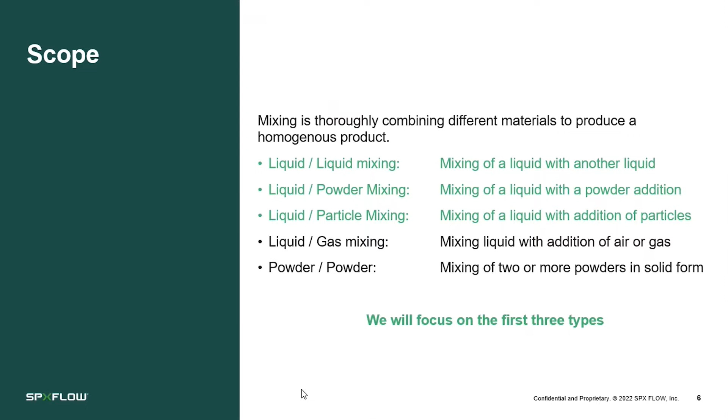Why is mixing so important? Well, here are some of the reasons. Firstly, consumer trends and tastes are evolving continually, and new products often require different ingredients to mix, or new or different mixing processes to achieve the desired result. Mixing often takes place early in the process, and the quality of the mix has a direct impact on the quality of the finished product.

Consistency, both in flavour and taste, is key to maintaining brand loyalty, and that recognition that comes from consumers recognising the quality of a product that they like.

Today, producers are expecting better efficiency in their mixing and in their processes in general, and the quality of the mix has a direct impact on the operation of downstream processes, for example, pasteurizers and homogenizers. And then raw materials are expensive, particularly more advanced ingredients, and producers want to mix ingredients as accurately as possible with maximum utilization of trace ingredients to minimize operating costs.

So these reasons why mixing is important show that both quality and consistency, as well as cost, are critical characteristics which a mixer can influence.

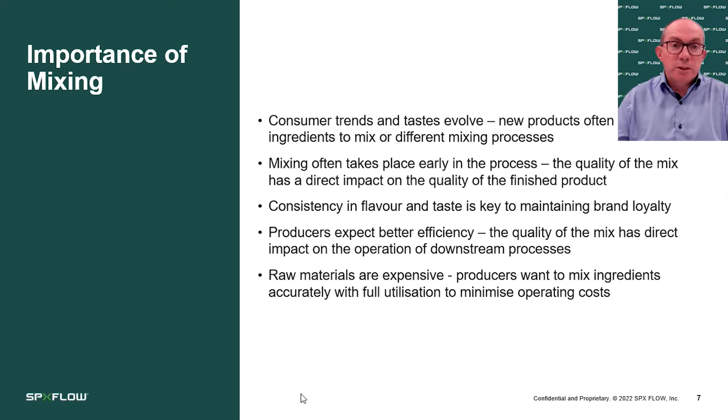So now I want to introduce the Flex-Mix Pilot Mixer. You see here that there are two models available, the multi-duty model shown on the left and the more basic model shown on the right. We'll go through the characteristics of both.

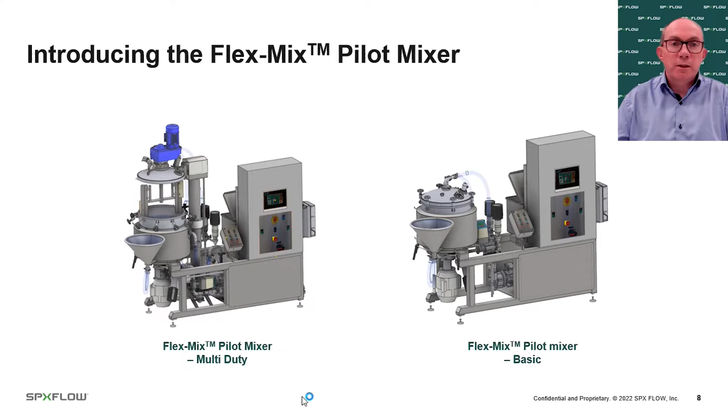These two models cover a number of different mixing techniques, which we'll talk through in the presentation. Firstly, we have atmospheric mixing for typically low viscosity products, such as ice cream mix or recombined dairy products. This uses internal recirculation and scales up to our Flex-Mix Liquiverter mixer.

Then we have vacuum mixing, also for low viscosity products. This is typically used on products like infant formula, plant-based products. It produces a better mix result than atmospheric mixing, uses external recirculation, and scales up to our Flex-Mix Instant mixer.

And then finally, we have high viscosity mixing with or without vacuum or heating. This is for products such as processed cheese, condiments, and bakery inclusions. This type of mixing has external recirculation and scales up to our Flex-Mix Multiverter mixer. This is the type covered by the multi-duty model, which in fact covers all three. The basic model covers the first two types of mixing techniques.

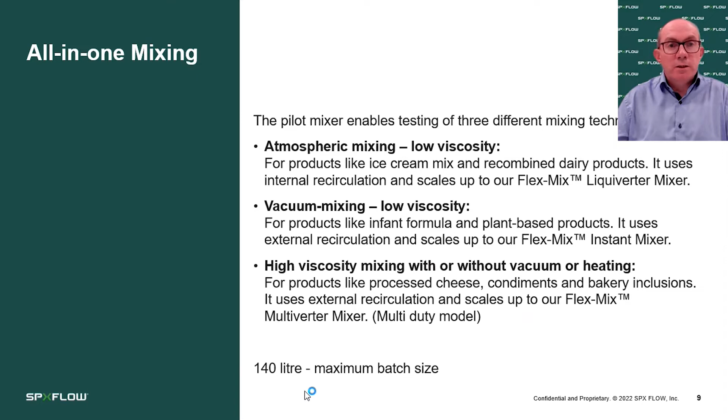The pilot mixer has a capacity of 140 litres, so it's very conveniently sized for small-scale test batches or slightly larger pilot-scale testing or production.

Now we look at some of the operating principles of tank mixers in general, and specifically the new pilot mixer. The heart of the mixer is the bottom-mounted mixer at the base of the tank, sometimes described as a rotor-stator mixer. This is a rotor-stator device mounted on a shaft, driven directly by a motor, and it generates a flow. This flow can be recirculated internally in the tank, or recirculated back around an external loop, providing additional functionality. So it acts both as a pump and a mixer.

When in operation, a vortex sucks both the powder and the liquid down towards the rotor-stator mixer. In both the mixer pump rotor and the surrounding stator, high shear forces and turbulence are created, ensuring effective and homogeneous mixing. In the pilot mixer, two different stator rings are provided for slightly different functionality. You see on the right the image of mixing without recirculation and with recirculation, using different mixing stators.

We'll take a look now at how it looks for the different mixing modes.

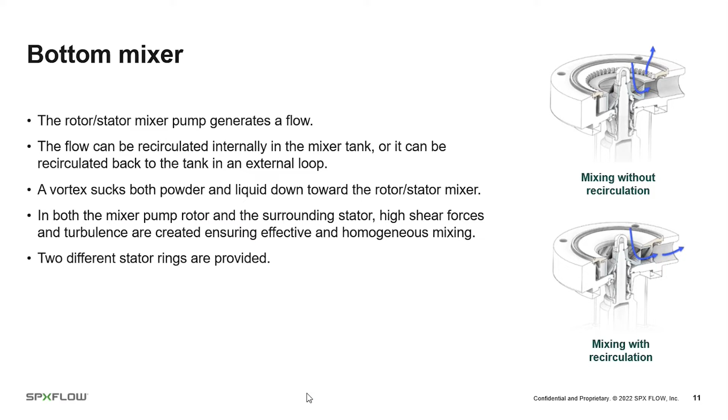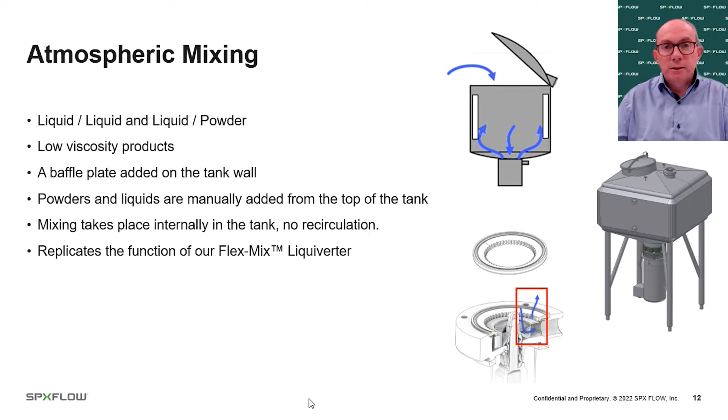We look then at vacuum mixing, a slightly more advanced technique. It's used for liquid-liquid and liquid-powder mixing, same as atmospheric, also on low viscosity products. But here the vacuum and closed mixing improves the mix quality. The powder is added by being sucked in through a powder inlet valve using the vacuum in the tank, and it's mixed in under the surface of the liquid under vacuum. The mixing has recirculation on an external loop, with pressure generated by the mixing head itself. This technique gives better mixing, for example with reduced foaming. No agitator or pump is required to operate this mixer, and it replicates the function of our Flex-Mix instant mixer. This is a more advanced mixer where higher quality mixing is required, or where there's a risk of foaming.

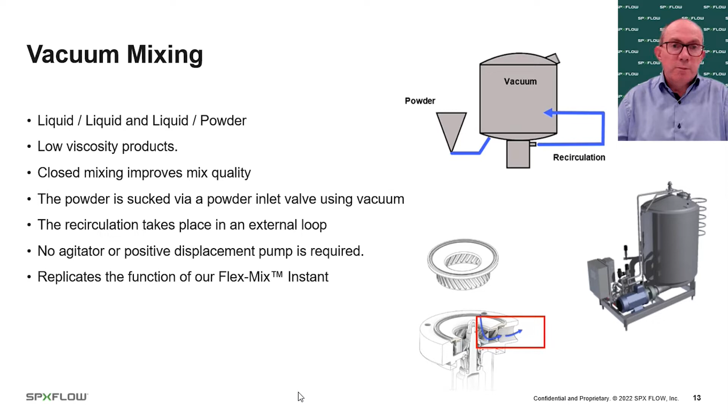Then we have the third type: high viscosity mixing with heating and vacuum options. This is covered by our multi-duty version of the pilot mixer, which also covers the previous two. This is used for liquid-liquid, liquid-powder, and particulates on medium to high viscosity products. The powder is still sucked in by the powder inlet valve using vacuum, as with the vacuum mixer. Additionally, we have an agitator and a positive displacement pump to give mixing inside the tank because of the product viscosity, plus recirculation externally using the pump. The tank itself is pressurized and has indirect heating on the jacket, with the option of direct steam injection. This replicates the function of our Flex-Mix multiverter range, used for those higher viscosity products.

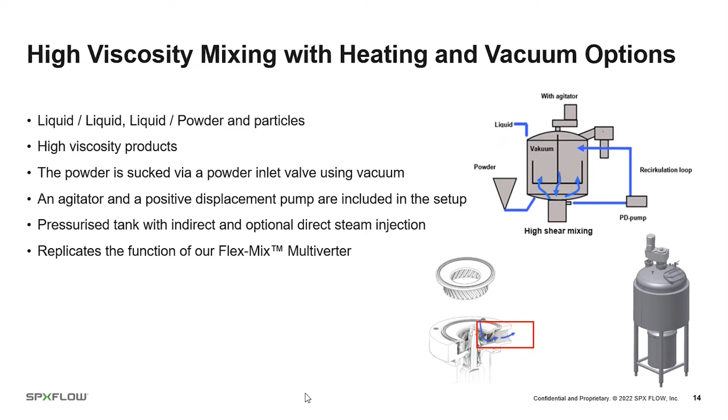So let's look now at the benefits of these mixers in the different modes and what value they bring. Here's a list of some of the features and benefits you get from them.

Firstly, it's a highly flexible solution. You can test a range of products from low to high viscosity in small batches, all in one mixer. You can develop recipes for everything from infant formula, ice cream, and plant-based products to dressings, sauces, and high-protein yogurts, to name a few. As well as being suitable for small test batches, small producers can also look at making small batch production runs from 80 to 140 litres, depending on the recipe. So if you have frequently changing products or need small batches, this mixer gives you the flexibility rather than having to make larger batches and have more product waste.

It's a sustainable solution. You have that flexibility to test in your own plant, or you can look at renting a unit from SPX Flow, or indeed come to or send product to our innovation centres where we can do the tests on your behalf.

You have reduced raw material waste because you can test smaller quantities and batches. It's a compact and ergonomic design, which just requires one operator to carry out all the functions. And then finally, and perhaps most importantly, it's scalable results and dependable results.

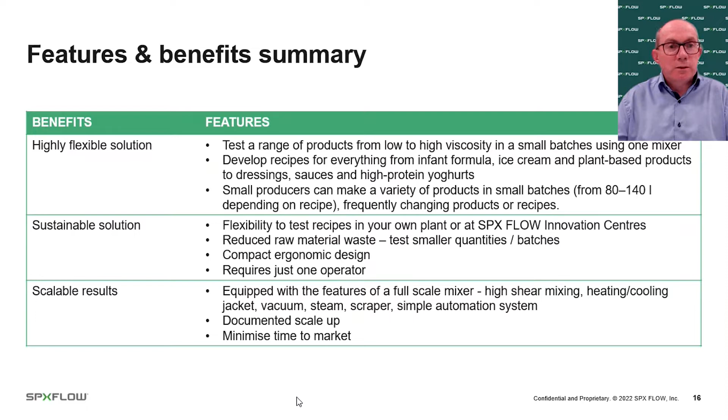Here's some of the applications that we can handle using this product. For example, mixing a product with low, medium, and high viscosities, operation of vacuum or atmospheric settings, and incorporating dry and semi-solids into the liquid.

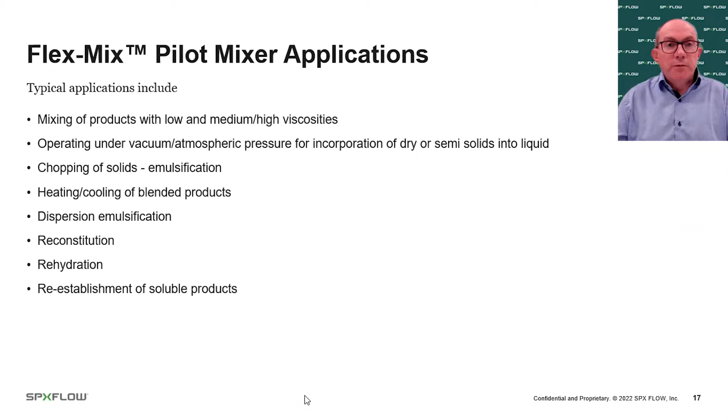Chopping of solids and emulsification with the mixing head, heating and cooling using the jacket, dispersion emulsification, reconstitution of powders, rehydration, and re-establishment of soluble products. So we have a very broad range of applications that can be handled.

Take a look at some of the key features. The image on the right here is the multi-duty version, which we talked about, which has some additional features. I won't go through all the details, the table sets it out, but some of the things to highlight are the scalability to our different mixer models, and the multi-duty version scales to all three, including the multiverter for the higher viscosity products.

The basic version has got the atmospheric and the vacuum mixing. Also to mention that the multi-duty version has the pressurized tank, the agitator, which is equipped on a lift arm that you can see raised here in the image.

A system for direct steam injection is provided as an option, as well as having the positive displacement pump as standard. So depending on your requirements, you would select the basic or the multi-duty pilot version, and a number of options are available additionally to tailor the mixer to your particular needs.

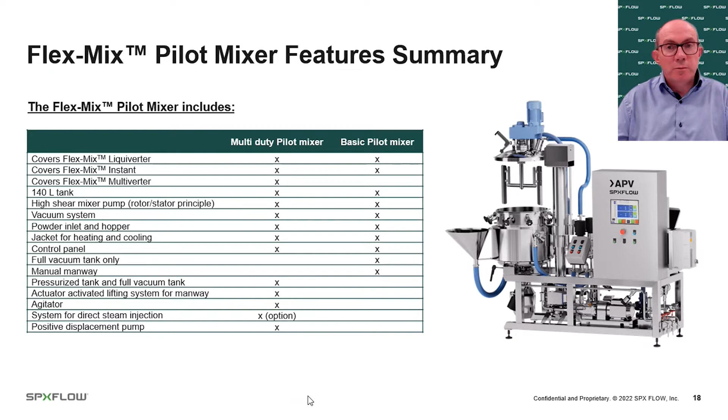Some of the key features and the overall dimensions. The batch size is 140 litres maximum, and as mentioned, it's 80 to 140, depending on the recipe and how the mixing function is set up.

We have an operator interface screen for controls, and we describe it as partially manually operated. That's because the operator needs to intervene at some critical stages to add ingredients, for example. But the control system takes care of the control of all the automatic parts and the temperature control and the instrumentation. The interior stainless steel is finished to 3A standards with 0.8 micron surface finish and polished welds.

And of course, it's a sanitary design for CIP cleaning. The tank in the multi-duty version is pressurized, or a full vacuum version in the basic. So that gives some different functions depending on the vacuum and heating requirements, for example.

The tank is fitted with a heating and cooling jacket on the tank and wall, and insulation of the outer jacket to conserve energy. We have a side-mounted inlet for minor ingredients and a bottom-mounted inlet for powder suction, again bringing that powder in under the liquid level to minimize foaming.

The heart that I mentioned was that bottom-mounted mixer with 2 stator types, which are exchangeable, for both the internal and external mixing setup. And the multi-duty version as shown here has the top-mounted scraper blade agitator, which is used for the more viscous products. So a lot of flexibility in the design, allowing you to configure it in the way you want for a number of mixing ranges.

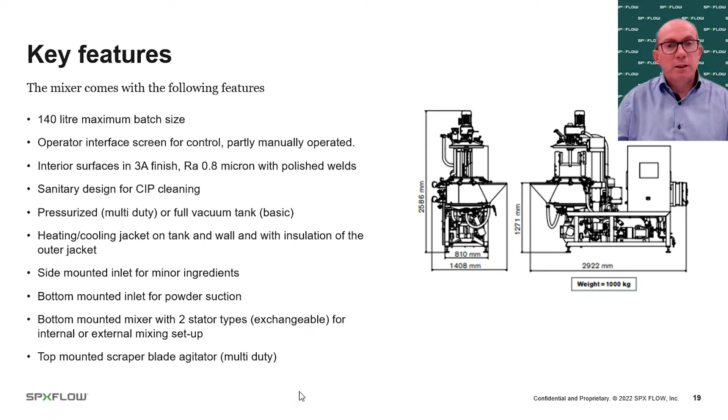Taking a look at the Flex-Mix range as a whole, which is broader than the tank mixers I mentioned. On top, we see the 3 tank mixer types used as inspiration for the pilot mixer: the Liquiverter atmospheric mixer, the Flex-Mix instant vacuum mixer, and the multi-duty Multiverter mixer, which has the ability to handle higher viscosity products. These were the inspiration for the pilot mixer.

Just to mention as well, on the bottom, some of our other mixer products: the Cavitator, used for high shear mixing and functional improvement; the dynamic inline mixer, the Flex-Mix DAR; the static inline mixer, the Flex-Mix TPX; and the Flex-Mix TPM. So we have a very broad portfolio of mixers, and please feel free to talk to us directly or to your representative to learn more about the different mixer types other than the pilot itself.

We have a lot of experience in our innovation centers testing different products, recipes and formulations. You can bring your product yourself, rent some of our equipment, or we can develop the product with you and do the testing and subsequent treatments as well, for example heat treatment. Please talk to us about your mixing needs.

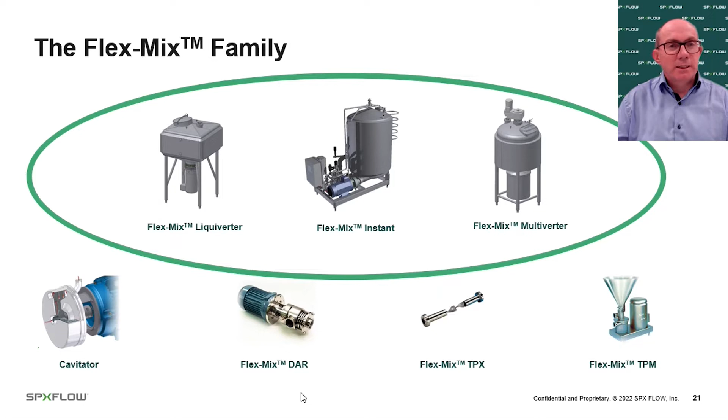Coming back to the pilot mixer, it's our all-in-one mixer solution. To summarize the key characteristics: it's a new way to test recipes at a smaller scale and with reduced waste. This allows you to take your ideas further, to iterate through product development and changes in recipes to get just what you need with the least product waste and ease of use. Very importantly, it allows you to scale up confidently, because we've condensed those functions of our full-scale mixers into this pilot. You can be confident of a dependable scale-up when it comes to developing full-scale production.

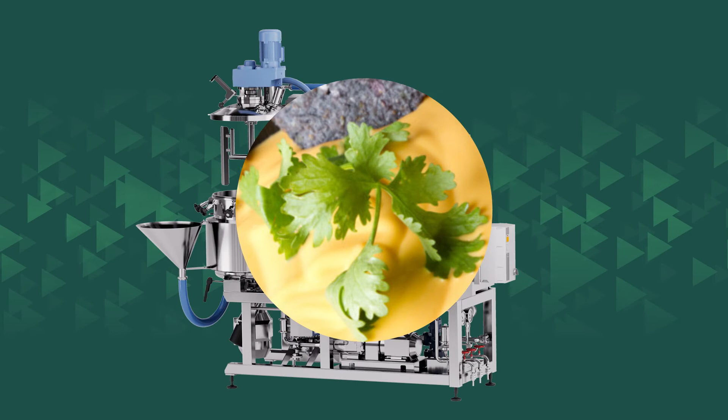Okay, thank you everybody. I'm joined here now for some Q&A by my colleagues Ulla Skitta and Ben Chow. Ben will be coming on just in a moment, I think. Ben, if you want to unmute yourself, please. So some questions coming through. Thank you for the questions coming through so far on the Q&A panel.

Just to repeat some of them here for the benefit of the rest of the audience: one question was around what is the minimum batch size? Ulla, I'll let you take that one, please, and maybe talk as well about the recipe considerations. We said in the presentation it was from 80 liters up to 140, but it really depends on the recipe you're going to do. You have to make sure you will have about half of it as liquid before you enter powder or oil. So the minimum batch size really depends on the application. If you're going to make mayonnaise, you'll have a lot of oil in there, so you will have a higher batch size.